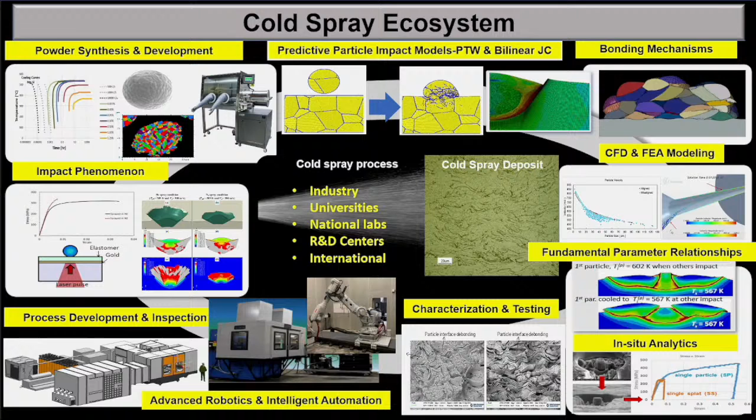I'm not going to go into these areas, you can read just as well as I can. But there's basic research opportunities, testing and qualification, certification, transition, implementation, and development and sales of feedstock powders, equipment, additional hardware, software, accessories, support equipment, etc. That's the ecosystem, and it's not a closed system, it's an open system. We try to make it as open as we can.

We know cold spray. I've personally developed with my team through the years applications and transitions into all these areas - oil and gas, automotive, especially aerospace, right? That's basically the first industry I targeted. But there's others, including medical, antimicrobial coatings you hear about.

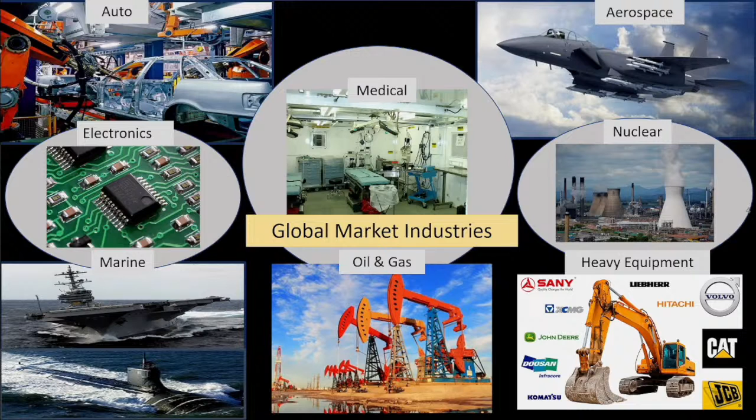And it's so funny, because the work that I did with the team from 2008 to 2010, we published some papers in like '12, '13, basically touting the benefits of antimicrobial coatings. Well, people are crawling out of the woodwork now. If they would have implemented stuff that I had said 10 years ago, we would have been much better off. So there's a lot of visionary statements that I make through the years, that other people make, presentations you'll hear today, and 5, 10 years from now you'll be saying, geez, I heard that first at CSAT.

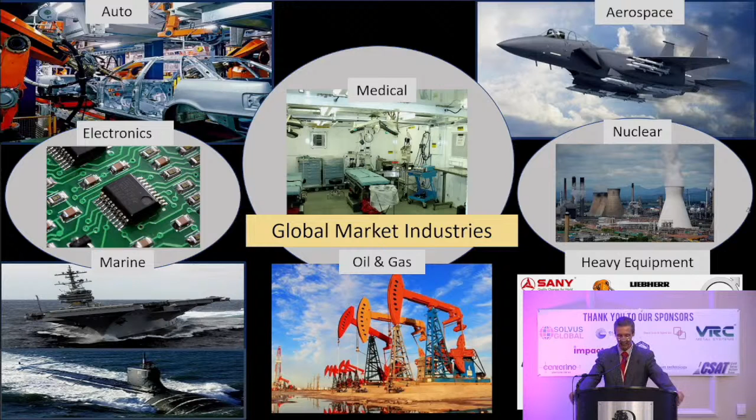And so with that, I'm going to throw up this slide. So part of what I've been doing is to substantiate some investments with folks that I work with, market studies.

This just happened, you could pull this off the internet, that's where I pulled it from. But it shows the tremendous upward trend. And a lot of these areas, I'm looking at Aaron Nardi, through the years that we've developed - we've developed and impacted a lot of these areas. So you see the significant rise.

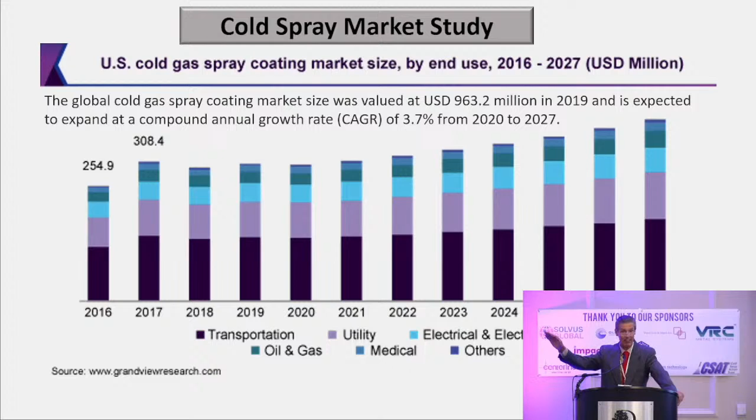Now, I think in dollars we're still about just shy of $1 billion, where thermal spray, I think Keith, is upwards of like $8 billion. And I firmly believe we should be in upwards of that number. And with the advent of 3D printing, I think we should be surpassing that. I think that's what the future holds.

I pulled this to show the importance of additive manufacturing. I'm going to tie it into manufacturing at the point of need and 3D printing. But this is a DoD mandate, and again, you can pull this off the internet, that's where I got it. You see the distribution statement, you see the website where I pulled it from. And this is a directive coming from DoD on the benefits, the attributes, and the go-forward plan.

We need more lethal systems, powered by innovative designs, kind of a general statement. Increases materiel readiness, empowers warfighters to solve problems in theater, right? We don't have to rely on a depot, we don't have to rely on a repair station in theater. But it depends on, hey, how far advanced are we? Are we mature enough? Level of expertise, training, certification. You can buy a system, doesn't mean you know how to use it, all right? And then finally, data.

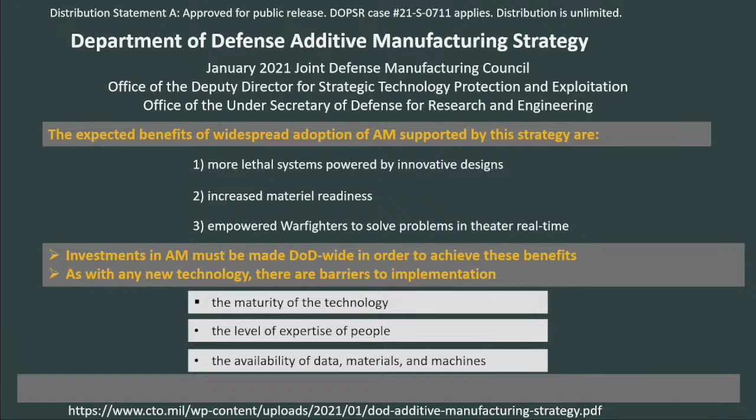Data, data, data. When I first started, the ESTCP program, which serves as the poster child for qualification of non-structural repair, is the one document right now that contains the most data on any single material substrate combination, that's how I'll say it. And that's all going to contribute to how far we get.

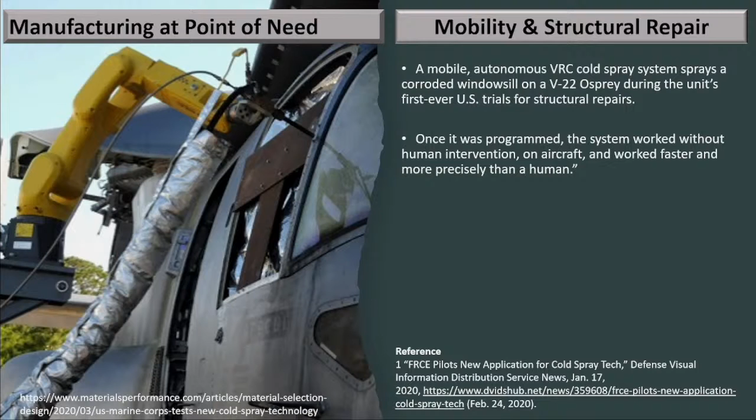All right, I'm going to show you a couple of 2-3 examples, highlights again over the last year or two. I wish Fred Lancaster were here, because this is where he could bathe in the limelight. So this is a news press release on the VRC system, a mobile system, repairing a windowsill area on the V22.

So it's basically a mobile system, you see it's attached to a robot. It can be manipulated out in the theater, out on a tarmac, wherever you need. And here's a quote from Fred: the future is with structural repair. And I'm going to go so far to say he's absolutely right, and go beyond that - structural repair and 3D printing.

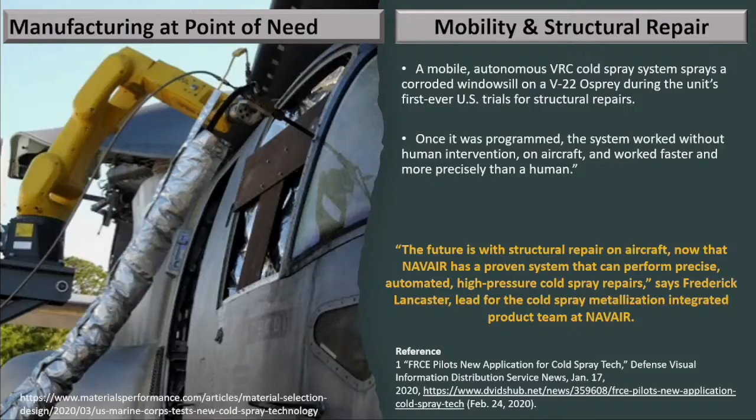I'm going to give you another example of a different system. This is amazing too, and I just heard...

That this August, the Aussies and the U.S. Marines are going to be doing joint maneuvers out in Australia, in the outback, and they're going to be taking a number of these systems out there, not only producing parts, because they've done this before—I think this will be the 3rd time together. Actually, I heard about it, I'm looking at Aaron, because we had to do a tour for a general who basically said, hey, could you do this? I just came back and we maneuvers with the Australians and they're doing this.

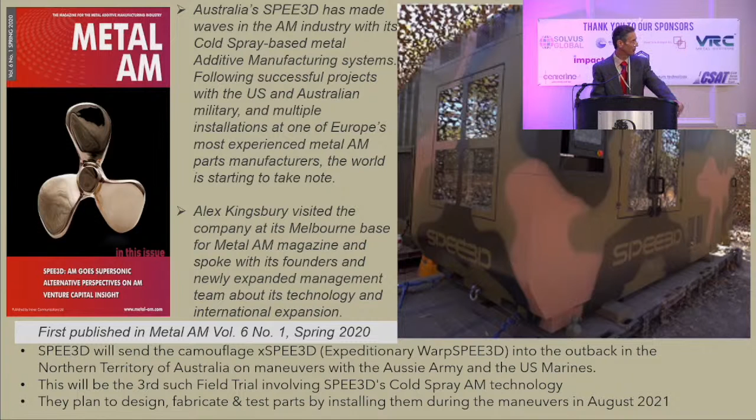So you see, basically, the SPEE3D unit, instead of that bright fire engine red, is camouflage, right? Because that wouldn't go over well in the theater—you'd be a target. But they're making parts, and not only that, they are going to be inserting and testing those parts in theater over, I think, a 2-week period. So that's pretty neat.

All right, these 2 good-looking guys, right? This is over the last year. All right, and here's my quote—I've said this since day one. It's not just a coating technology, it's not just for repair. The future is going to be 3D printing.

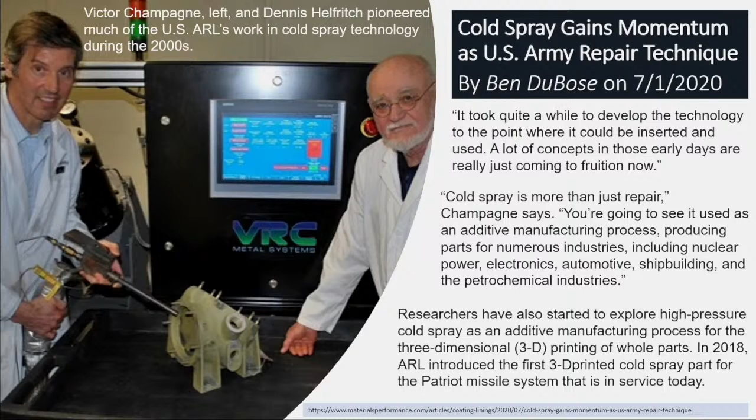So that was printed like last August, July. This thing has a delay. Here's a near-net shaped part. It was produced a couple years ago, 2018, introduced into the Patriot missile.

The future of cold spray systems—I just want to, and I'm going to end with this too. At the end notes on the second day, I'm going to go into this in more detail. But what I see in the future perfect system, and I had said this when I was the keynote speaker at the 2007 International Cold Spray Conference, the 2011, and I'm going to say it today in a different note: the future system, it's got to be flexible.

What does he mean by that? It's got to be adaptable. Flexible, adaptable—I want that future system to be able to do high pressure, to be able to do low pressure, to have software and hardware to do 3D printing. I want that system to be modular in concept, but at the same time be turnkey. I want it to be able to fit in the manhole cover in a submarine because of its modular concept, being able to be taken apart and put back together again. Or I want it in a production setting, out in the middle of the desert, or anywhere else.

I want it to be repeatable. That's not just me—the whole additive manufacturing industry, it's got to be repeatable. You've got to get repeatable results. They've got to be reliable results too, all right? Am I hitting the requirements, the specifications?

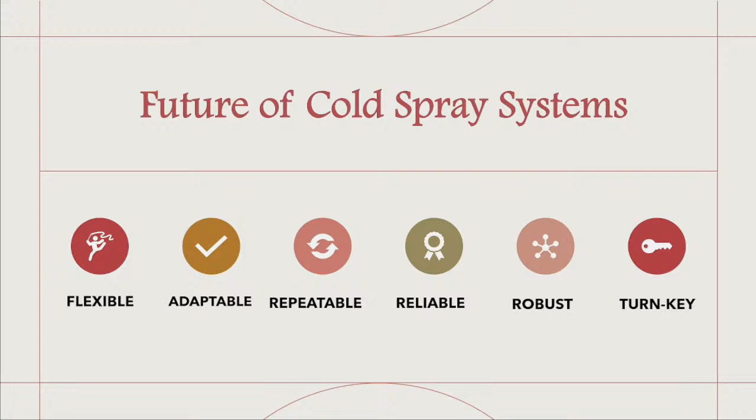Let me tell you a little story. Not all powders are created equal, all right? And I've got a lot to say, and I got to blow through these slides, but it's important. I don't want people using that argument against me by saying, oh, look, you got to buy special powders in order to use this system or that system. Oh, I don't want that. I want to be able to use off the shelf. And that's fine—number one, you can buy these powders off the shelf that are made specific, all right?

But number two, if you're doing a bubble gum repair—and I call the bubble gum repairs what? You're using Bondo, you're using epoxy repair, you got a ding in something, you put a little epoxy—I don't care what kind of powder you use, it doesn't really matter a whole hell of a lot. But when you go to structural repair, when you go to making a 3D printed part and you don't want to post-process, heat treat, anneal—you don't put any work into your feedstock powders, garbage in, garbage out. Actually, I stole my own thunder, right?

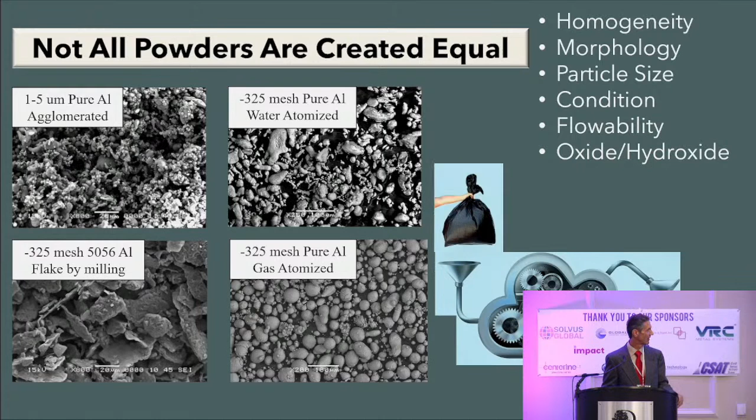This thing has a delay. It's ticking me off. You have to actually press it a couple of times for it to do it once. But anyway.

This is aluminum powder, okay? So to the uneducated, I'm buying some aluminum powder, just give me the number and I'll call. You could get any one of these for aluminum powder. They all meet the chemistry, they'll all meet the past requirements for aluminum powder. I wouldn't meet it now because we've got flowability, we worked into the specification and other things, so you couldn't get all four of these.

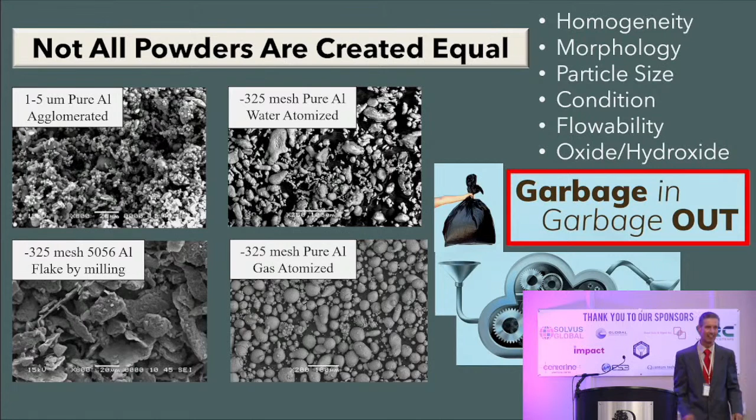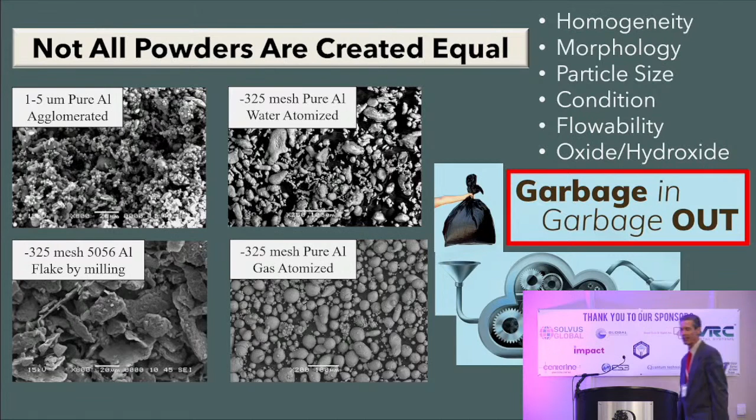Did a little experiment. A guy did his PhD thesis on this that I know. What he did is he took as-received powder, he exposed it to humidity.

And what I mean... oh, they can't hear me online? Okay, alright. So you got to have one of these walking things. I got a little animated here. You got to chain me to this damn thing so I can't see the slide. Actually, I wonder if this helps. No, that's worse. So anyway.

We wanted to expose it to humidity, and I fought with people—I won't say from where, from DOD—who told me that aluminum powder doesn't further oxidize, doesn't form more oxide once it's in a gas atomized condition. That's a bunch of crap, alright? As a matter of fact, I got a further slide—you know what they use aluminum powder for? It's a desiccant. What's a desiccant? Something you use to absorb water. Hello? How does it absorb water? It's a chemical reaction that takes place, and you form hydroxides.

Well, picture yourself at Corpus Christi Army Depot in the summer. Got a bucket of powder that you buy. Typically they don't buy powder just for one spray trial or one spray run, no, they'll buy a bucket. They'll open that bucket up, put in what they need, and then leave the bucket open. If you're lucky, they may close it. Doesn't matter—in the experiment, we opened up the bucket, closed it, opened it up again to simulate, like a couple, 2-3 weeks of doing that. And then we characterized those exposed powders and compared it to a baseline.

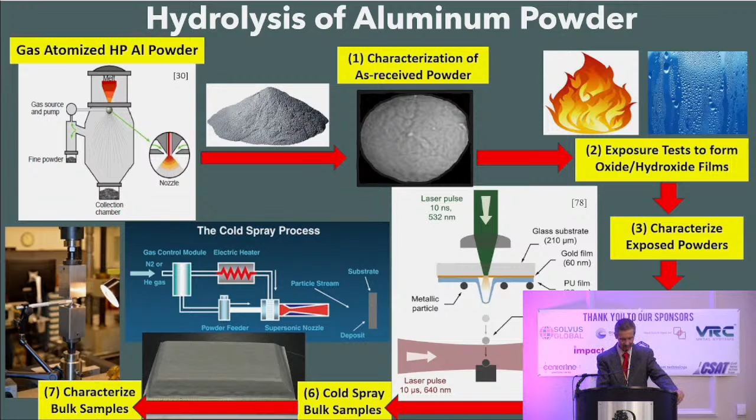I've already said this, yeah, I'm going to point this out again—for those that don't know, aluminum powder is a desiccant. So for people that say, well, what test did you run—you can read just as well as I did. We did everything under the sun to characterize the oxides, the hydroxides, before and after. The most in-depth study that I've ever done, I bet anybody's ever done that I've ever read, by far. Look what happened to hydrogen, look what happened to oxygen, comparing the as-received to the group that was exposed to 95% humidity.

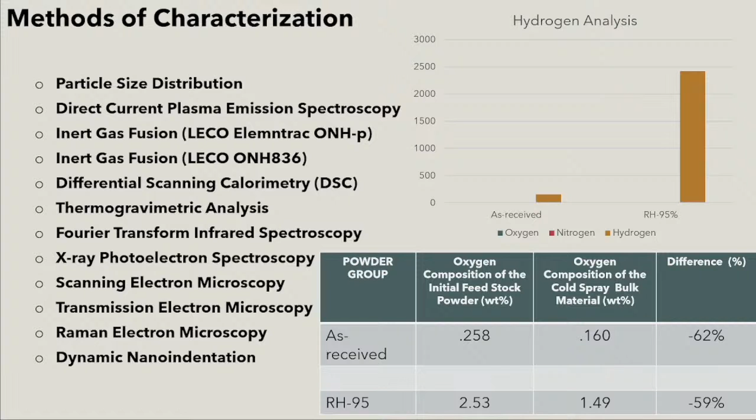It went through the roof. You don't get hydrogen from the formation of an oxide, you get it from the formation of the hydroxide. So it hydrolyzed—that powder hydrolyzed. I'm not going to point out all these different samples. We did experiments heat treating the powders, and you see the differences in ductility. But the point I'm trying to make: you open a bucket of powder, it gets exposed to humidity, it's going in the crapper pretty quick.

And we've experienced that firsthand before we knew this, alright? We got properties in the as-received powder that were great. We sprayed it a week later, and it was garbage. You're doing bubblegum repairs, doesn't matter—you're going to structural, you're going to 3D printed parts, you don't have specialized feedstock powders, you're asking for trouble.

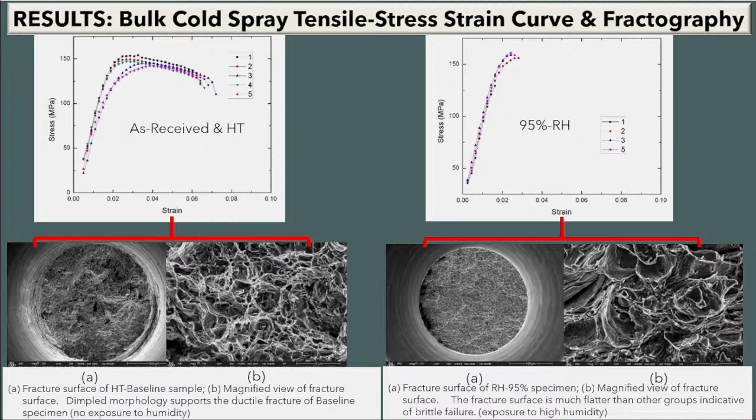Differences in fractography—you know, I don't want to just be a talking head about programmatic stuff, I love the technical stuff. Ductile dimpled in the as-received, intergranular brittle fracture in the high humidity sample. So what did that mean? You got an oxide, hydroxide formed on the outside of that particle, all bombarded, formed a big block of material, bunch of oxide in there. You pull it, it's got no ductility whatsoever, and it fractures in a brittle fashion. You want that on an aircraft? I sure as hell don't.

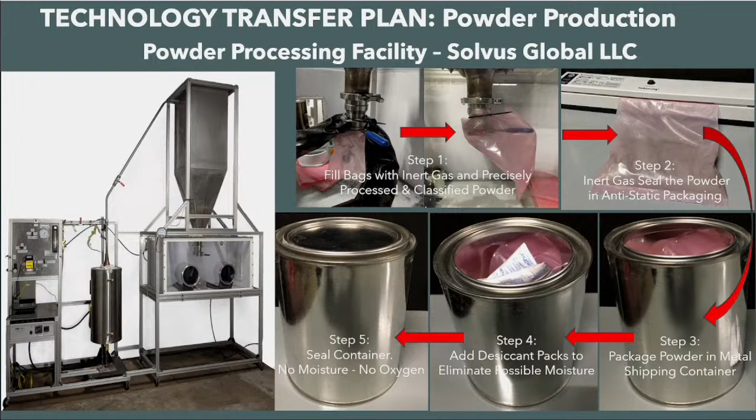This is a process that we use now. We process the powder, we have preferred geometry, and I'm not going to go into all of the different QA tests that we do, but it's flowability, it's chemistry, it's geometry, it's particle size distribution.

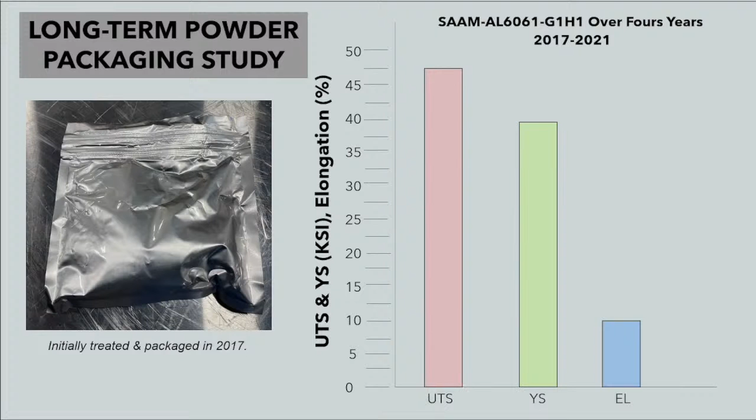And it's packed inert. This is a fascinating study, and this was part of the PhD thesis. I had data which extended to a year at the time. Now we have data that extends out since 2017. I just did some averages and made that chart.

But basically after 4 years, think of a can of tuna. Whether you eat it on day one or you eat it 3 or 4 years from now, you're not going to get botulism and die.

The cool thing about this is 4 years later, in that inert package, I can use the powder. So if I'm on an aircraft carrier out in the middle of the Pacific and it's humid as hell, that powder's protected and it's in its own little cushy world in that inert environment, saying, I don't feel the sea mist, I'm not hydrolyzing, I'm having a great time, I'm nice and dry.

And if you get so inventive, which we have, you can develop a little nipple on this thing such that you've had a female and a male connector to your powder feeder. So even when you put it in a powder feeder, you don't even have to expose it for those few seconds or minutes, if your heart so desires, if you want to keep it to that level of control.

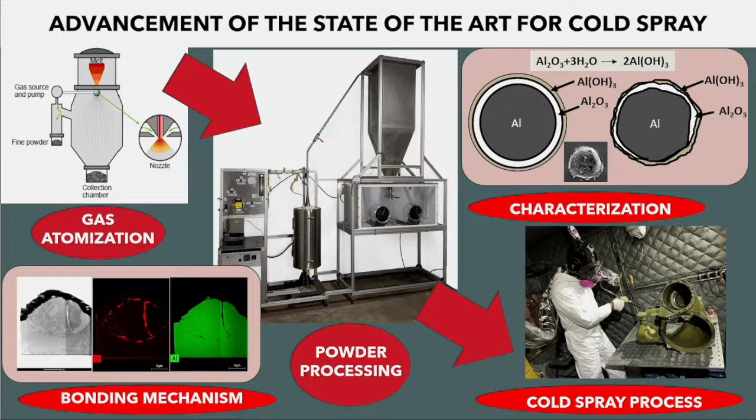I made a little cartoon. So don't think your Al powder has a nice little candy coating like an M&M of aluminum oxide on it when it gets hydrolyzed, when you open it up at CCAD. No, it will hydrolyze immediately.

Helium recovery, I want to end with. Don't think that you can't use helium. You can. There's an actual system.

Actually, I want to go back. That was the concept of just having a turnkey helium recovery system that would be efficient within a short period of time. That short period of time differs depending on how much flow you have.

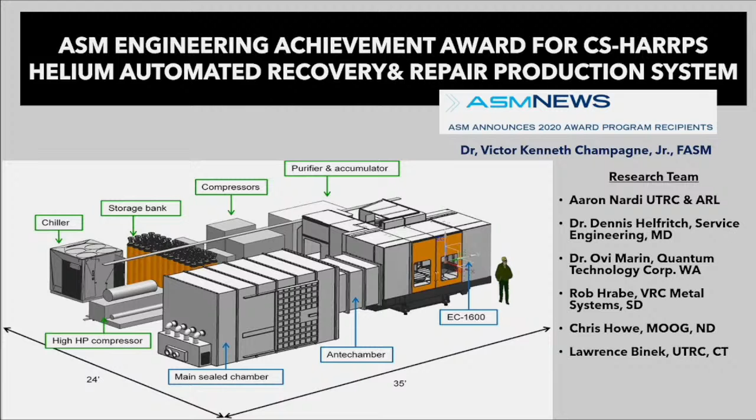I don't have time to explain the entire system. You can see me afterwards, we can discuss it afterwards. But it becomes efficient, I'll say between 20, 30, maybe 40 minutes, depending on the flow rate. So if you've got a 5-minute spray, a 10-minute spray, you're not using this system, but anything else, you do use that system.

It's recovering anywhere between 94, 95% when it's fully in operation and you've got long sprays. That's kind of what it looks like. This is a little cartoon that I threw up — it's God's honest truth.

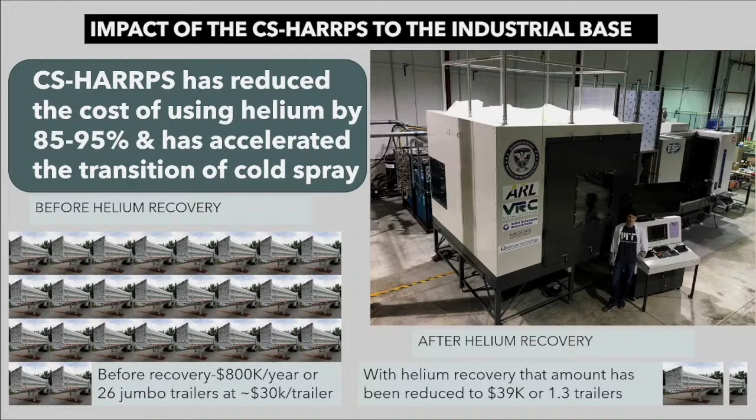When I was at ARL, we were spending 800 grand a year, and that's how many trailers we would have. With the helium recovery, if you were to use it, you'd see that those 26 jumbo trailers would be reduced to like 1.3.

But it talks from a practical perspective. So a guy in a depot, this would be beneficial to. But then also an academic, it would be beneficial, because it's got the theoretical explanation, but the backbone of it is practicality. It's almost like a how-to book.

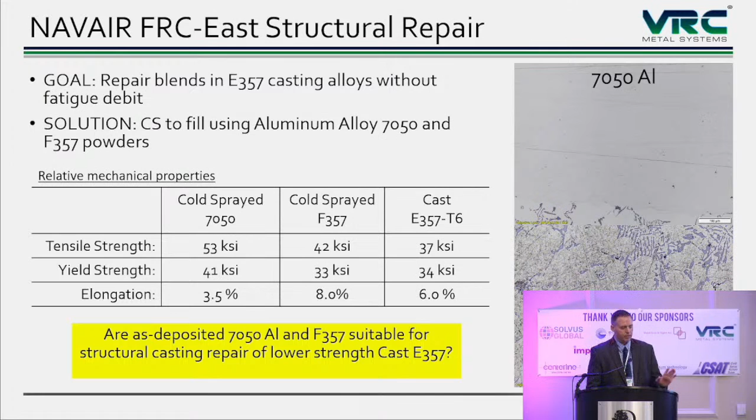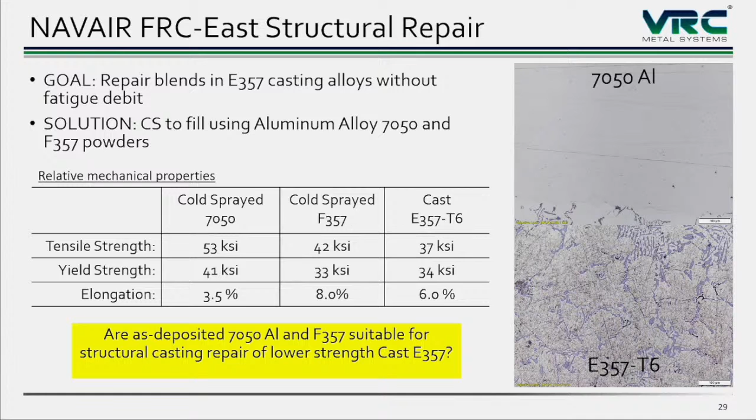So what you see here is some properties of 7050, and then F357 as repair materials for the E357 casting. What's interesting is the strength values of each of these materials is actually higher than the E357 substrate. So in this particular case, we're spraying on material with a higher strength than the substrate material. So now let's see how it performs from a structural standpoint.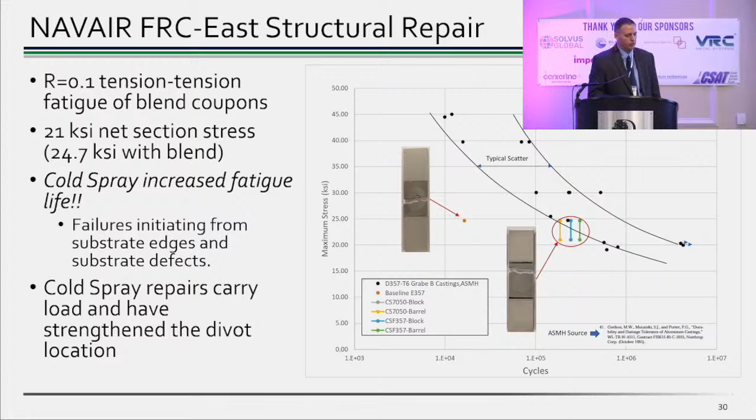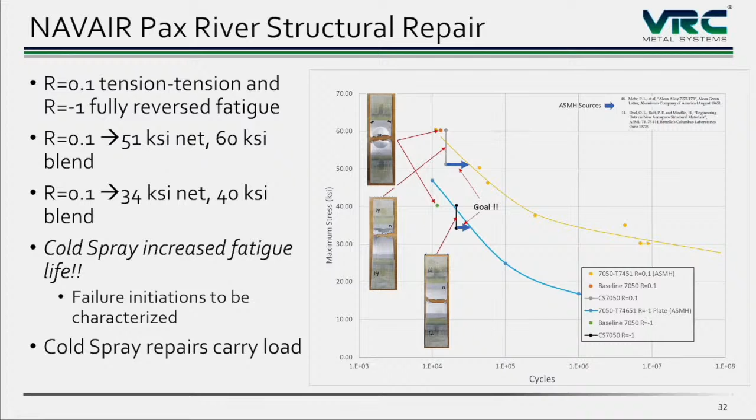So now let's look at a different scenario. If we take that same 7050 material, the cold sprayed material, but now we apply it to a 7050 substrate instead, you can see that the wrought 7050 material has a higher strength capability than the cold sprayed material and a higher ductility. So now can we still use this for some sort of structural credit? Well, we find out we can. In fact, the baseline materials here are this green dot and this little red dot up here.

If you look at the improvement we get at both R equal 0.1 and R equal -1, we're seeing an increase in load carrying capacity. Now, we haven't gotten back to the full strength of the material. That would be where these blue arrows are. We would want to push those cycles out to that yellow line or that blue line. But we are getting increased capability over the divoted sample.

So if you can allow a blend, then you can repair it with this and not have any further damage to the part.

All right, so with that, I'm going to switch gears a little bit, and this gets into, as we start to transition to point of need use, can we go from having to generate nitrogen and use nitrogen, can we go to air?

So we're looking at that for a couple different materials here. One is the WIP material that Vic talked about earlier, which is a nickel-based blend material. And then the other one is an aluminum blend using 7075 powder. So what you see is in both cases, if we look at Positest adhesion testing, so that's your normal glue failure button, right? And then you look at porosity, you see really no difference between these two.

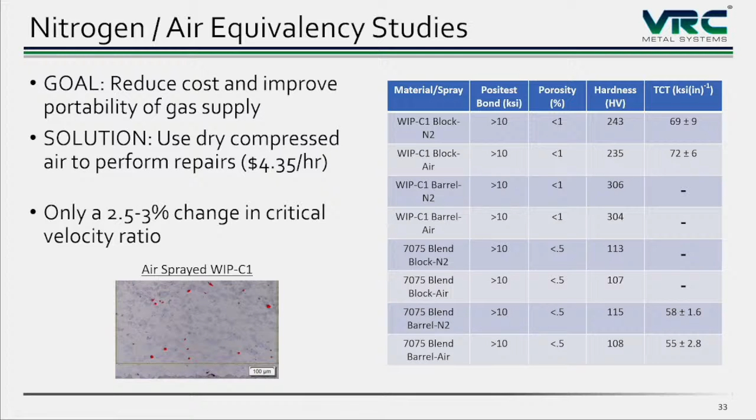Now our predictions say that we should see something like a 2.5 to 3% reduction in the critical velocity ratio going to air. So where does that show up? Well, so far the only place it's showing up is in hardness. And while it's debatable because the differences you're seeing are all within the typical scatter of a Vickers hardness test, you can see consistency from nitrogen to air where you are getting a little bit of a drop each time when we go from nitrogen to air. So we are seeing a slight difference. However, that amount of difference can be easily made up with process conditions. Modify process conditions and you're back to where you were with nitrogen.

Okay, so that's my materials part of it. I'm going to talk about equipment now, a couple of equipment developments.

One is in nozzles. This was a project looking at applying coatings to large surfaces. So if you want to apply a corrosion inhibiting coating, like a galvanic protection, for instance, to a large surface, how might you do that?

Well, we know that cold spray has a very constrained plume, which is nice for us when we're trying to repair parts. It makes masking a lot easier and so forth. However, when you want to coat a large area, having a very constrained plume means you have to have very high accuracy of your path planning and so forth. So if we go to a wide area nozzle where we can spread that plume out a little bit, that'll make coating large surfaces easier.

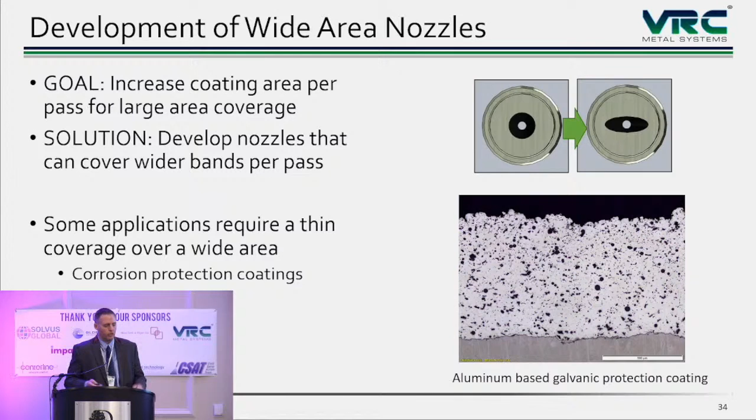So we're looking at a couple different geometries. The first is, well, they're both an oval or an ellipse exit, but using a standard circular throat. And what we did was we took our nozzle 60, which is here, and we took the expansion ratio we had on nozzle 60, which works very well for a lot of these nitrogen sprays, and we opened up the exit to an ellipse, but maintaining the same expansion ratio. And we got two different ellipse shapes here. So let's look at the performance.

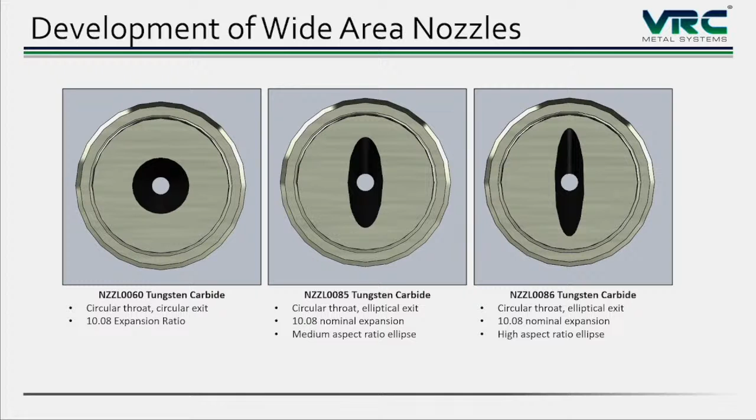One of the first things we would look at is velocity, right? So if we look at the velocity of the particles, we have here a range for nozzle 60 and a much tighter range for 85 and 86, which are these two elliptical nozzles. The range of velocities that you see on the 60 is kind of interesting because the 787 meters per second is actually for a very lightly loaded stream, and if you load the stream up heavy, it drops down to 747. The nozzle 85 and 86, it didn't matter whether we loaded it heavy or light, we got the same result. We got 745 to 748, all within a margin of error here.

So now, if we want to look at what the deposition looks like, you can see these are plates that were made with 4 spots and a circle in the middle just to look at the different paths and what the mounds in the corners look like. And you can see that with the circular nozzle, as you'd expect, you get a little Hershey kiss. And then when you go to these elongated nozzles, you get this wide spread of material going all the way from 8.6 millimeter spread on the circular up to 15 on the widest spread. So now that's going to allow you to change your overlap, your step.

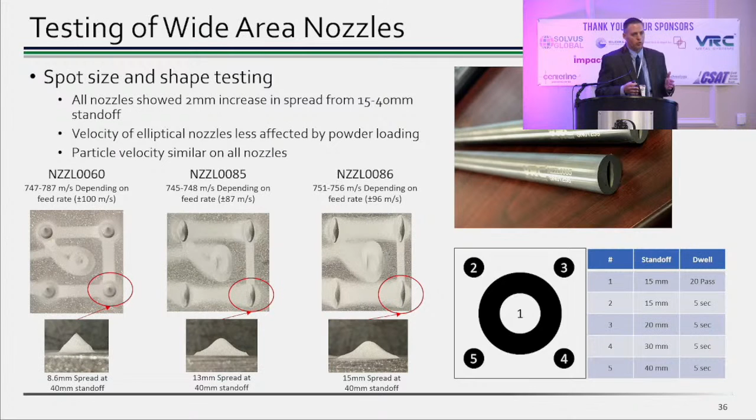All right, next piece of equipment would be the Dragonfly. We talked about this in previous years. I know the Navy's talked about this as well. This was a Navy program in order to fit a cold spray system down the hatch of a submarine. Well, we've modified the design, and we've turned it into a commercial product now, and with that came a couple interesting advances. One is that the hardware was changed inside the cabinet to actually increase the ability to change recipes on the fly. So now you can go from one recipe to another without opening it up and changing orifices and things like that.

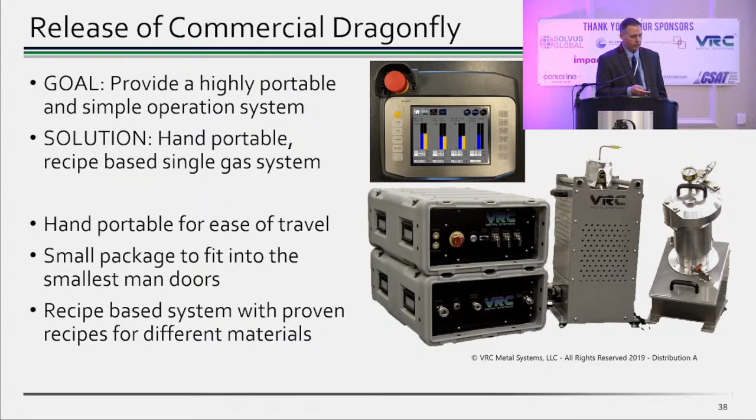So here's the functionality of the pendant itself. By the way, the system still has the same performance characteristics of 1,000 psi, 800 C as the regular systems. But in this case, one of the unique parts about this pendant is it's preloaded with recipes. So in this case, you don't get, like Vic was saying, a cold spray system you can't run, right? You need to learn how to run it. Well, in this case, it's preloaded with certain recipes so that once you get it, you can immediately go in, select those recipes. They're pre-qualified. We give you data sheets with them so that you know what you're supposed to get at the end.

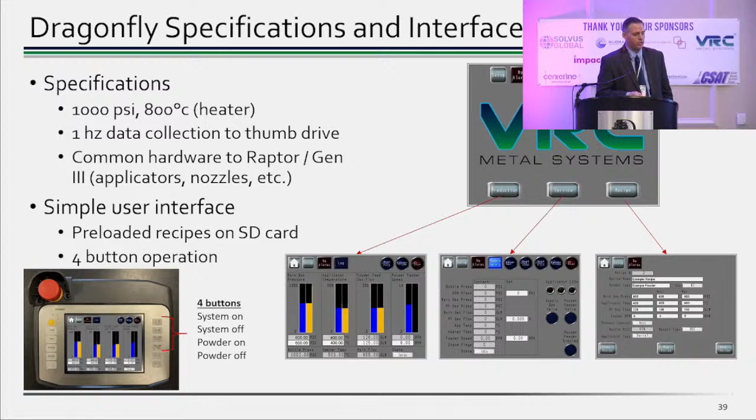And then you can start going, and the operation is very simple. It's a 4-button operation. Once you select your recipe, you press one of 4 buttons to start the system, stop it, turn the powder feed on and off, and that's it. So this is very turnkey for people in the field.

All right, so now we've talked about materials, we've talked about some equipment. Let's talk about how we put this out at the point of need for the warfighter or for other commercial entities to use. And here we have a trailer system. This is very similar to what Fred Lancaster had shown in previous years and what Vic had talked about today with the repair of that V-22. The major difference with this trailer system is it's got onboard gas generation. So in this case, we have air compression and gas cylinders so that this thing can operate all day long and then operate again the next day, and you don't have to keep bringing in tanks and so forth.

It's also got another, I guess, portable platform for the robot, which I'll show you on the next slide.

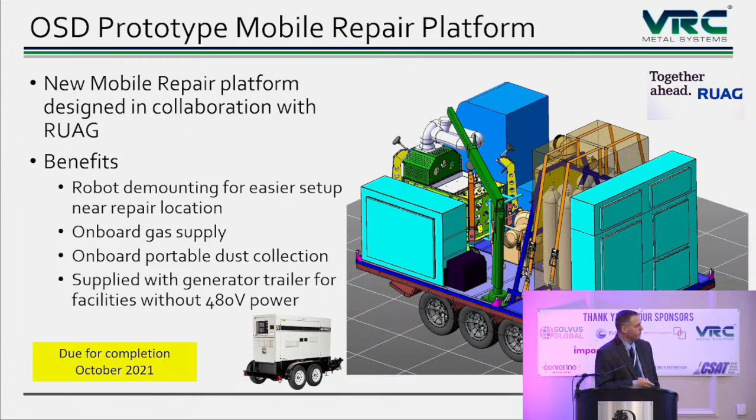There we go. So this portable platform for the robot is an electric cart, basically. It looks kind of like a beach cart to me, but you've got this cart with a robot arm on top of it, which also houses your heater and your powder feeder. So you can wheel this over to the aircraft or the vehicle you're working on, put down these little outriggers to stabilize the unit, and then run the robot and repair your part or vehicle. If you're doing a hand spray, you can dismount the gun from the robot, and then do your hand spray, but you still have all of your equipment right next to you, which is a little bit convenient.

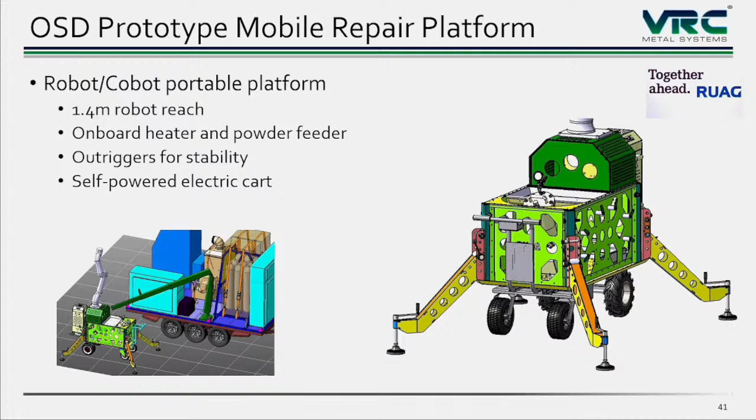And so the last one I'm going to leave you with is what we're calling the mobile parts hospital. This trailer and the mobile parts hospital were both envisioned through this OSD Mantech program. This one is unique—it's not something we've ever done before.

What's interesting about it is it's a complete turnkey system that you drop in place wherever you want it in the field. This is a full manufacturing cell for cold spray operations, including power generation and gases, which I'll show in a little video clip. This unit is due to be completed in August of this year, and the trailer is due in October.

So I think this should—hey, it worked. All right, so what you're going to see here is just a visualization of the unit. It's got doors not just on the ends, but on the side, so you can access each of the components as you go.

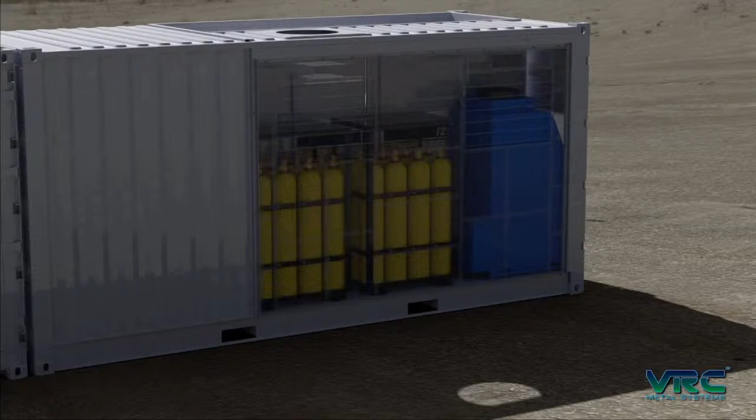Here's where the compressors are—that's a compressor and tanks. This is enough gas to run continuously for 8 hours of operation at max flow for the systems. If you're running at less than max flow, it will run even longer. You can run it almost indefinitely at roughly 800 liters a minute—around there, you can run indefinitely.

In the next compartment over, you have this generator, a 125 kilowatt generator. This supplies the power for the cold spray system, the robot, the heaters, the air conditioners, all the stuff inside this unit. It's all climate controlled and so forth.

In the next compartment, this is what we call the utility box—it's got the generator and the compressor in it. It's got a little area at the end, which should open up to show you a work area. Where these two join up, there's a joint that connects this work area to the next work area.

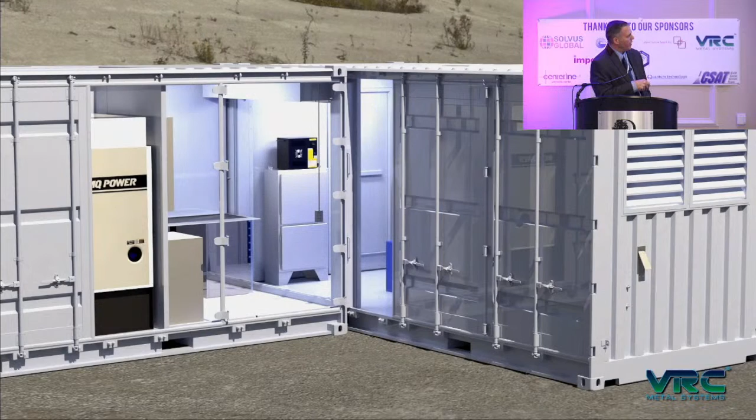So your actual spray operations would happen in this area. Your dust collector sits here, your control systems sit here. And then the final location—this door, when it opens, will be your actual spray booth.

So this is a full spray booth with a welding table, dust collector, and robotic arm. You can do all your work, whether it be additive manufacturing or repair, right here, and then operate it from that next room.

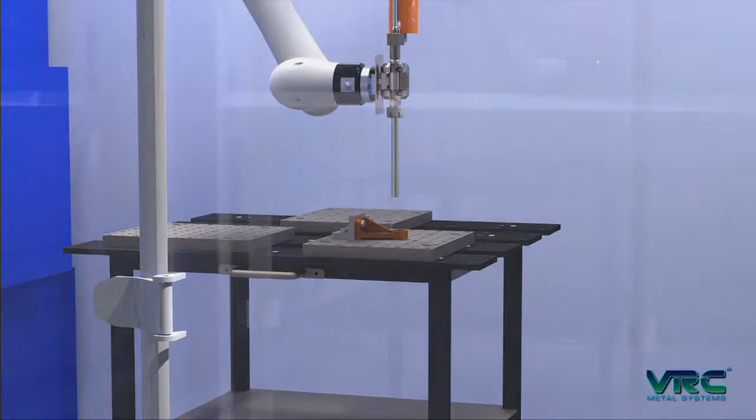In addition, once this thing goes on site, wherever it sits, there are also external hose attachments so you can go outside and do work, like on a vehicle for instance. In that case, you'd take the heater and powder feeder out, connect those up, and then do your work on the vehicle.

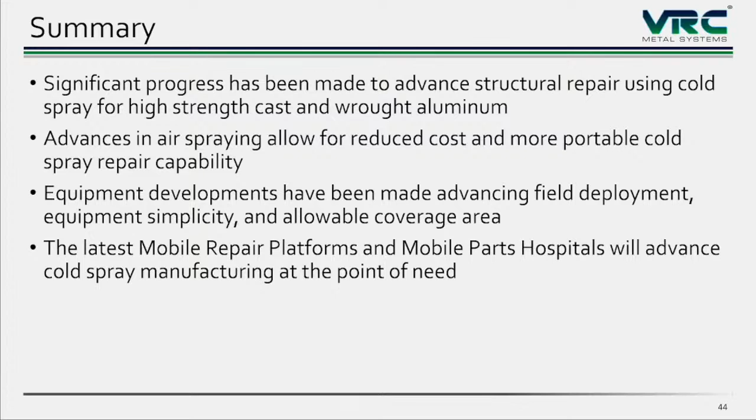And then you're done. So with that, I guess I'm gonna stop there. If there's any questions, feel free to shoot them out—I'll try to answer them.

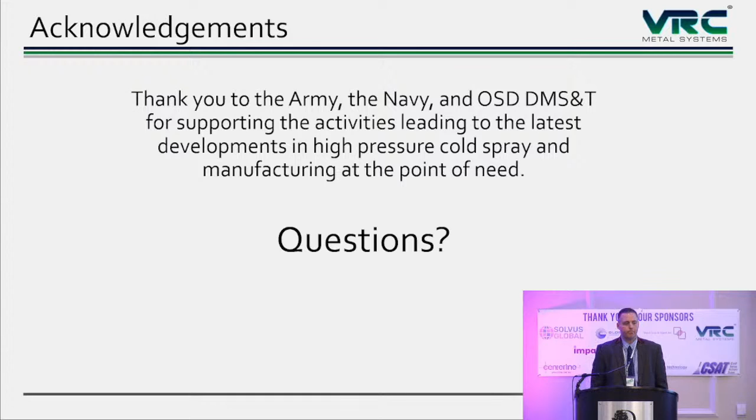Question: with the wide area nozzles, are you able to increase stream loading more because you're getting better consistency with the speeds, or is it still limited, and how does it work overall? So the question is, with the wide area nozzles, can we increase the stream loading beyond where we'd be able to with a standard nozzle? The gas flow through the system is the same because the throat is the same in that nozzle, so I wouldn't anticipate we could load up the stream any more.

However, I think today we really can't utilize the gas the way we need to anyway. We can actually load up a nitrogen stream a lot more than we ever do. Typically, even at high RPMs on your powder feeder, you're still only at 2% stream loading for most materials. We can push that up to 5 easily—that's been shown by Sandia years ago. And actually Ozone did some work pushing it all the way up to, I think, 40% stream loading. So we have a long way to go on stream loading; we're not limited by the nozzle today.

Any other questions? Comments? Yeah?

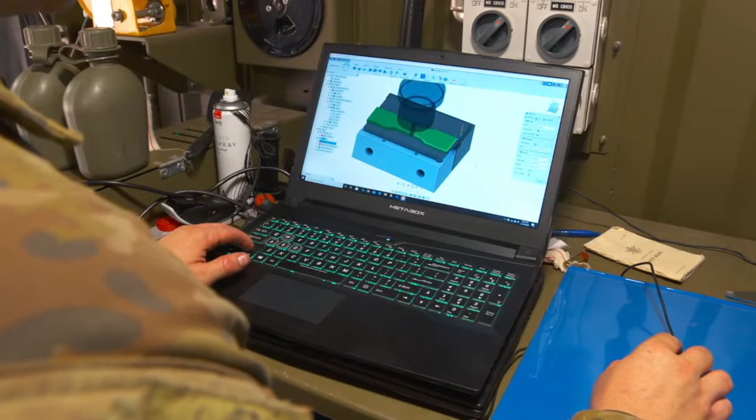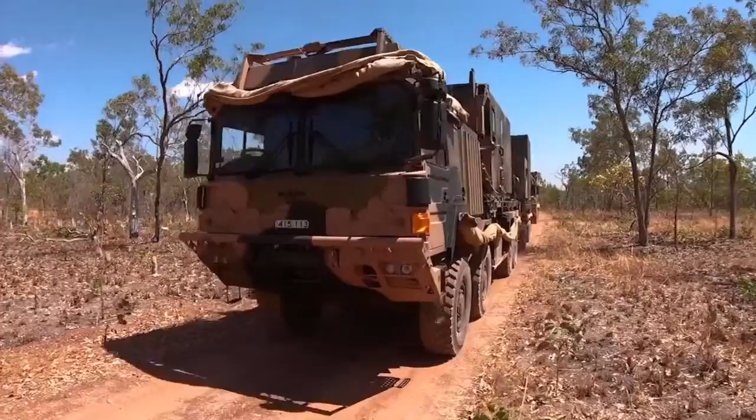Earlier this year, the Australian Army announced a $1.5 million investment into a 12-month pilot of SPEE3D technology. The program includes training soldiers in 3D printing and trialing SPEE3D's large format WarpSPEE3D 3D metal printer. The trial is designed to test the feasibility of deploying these printers both on base and in the field. WarpSPEE3D uses patented cold spray technology that enables significantly faster and more cost-effective metal part production. Developed in Australia, the printer is capable of printing large metal parts up to 40 kilograms at 100 grams per minute. The trial has proven the printer and auxiliary container can be easily transported on the back of HX-77 trucks.

This 2-week training exercise at Mount Bundy is the second in a series of exercises in which we are putting the WarpSPEE3D through rigorous field testing, for example loading and unloading in various terrains, emergency stops and redeployments, and general operation in austere environments.

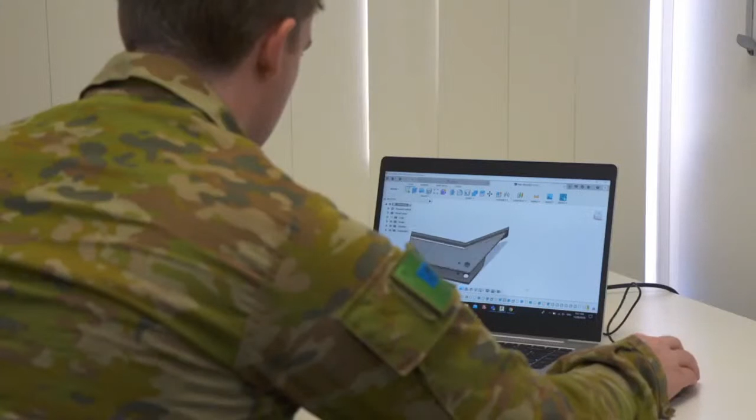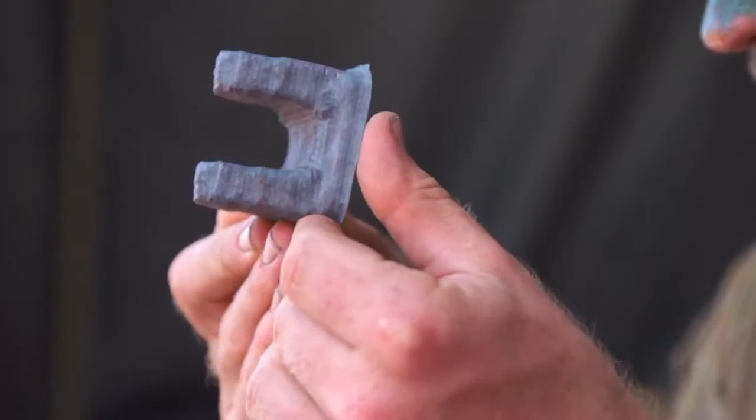Soldiers have been training at Charles Darwin University for over 6 months now, learning everything from design to certification of 3D printed parts. They have produced over 50 case studies of parts that can be replaced in the field with metal 3D printing. As an example, here is one of the parts produced today, a bulk fuel module mounting bracket which enables safe operation of manual fuel pumping. This part was designed by one of our trained soldiers and is able to be printed, heat-treated, machined, tested and put to use here in the field.

The ability to print repair parts in a deployed environment will significantly reduce our footprint and repair damaged equipment on the spot to get us back to our main priority.

Fantastic. Okay, so that video there gives you a flavour of what the SPEE3D and Australian Army trial was all about. Actually, in the first 6 months, using cold spray, we as an army were able to demonstrate that the technology exists to allow soldiers, and therefore, if you wanted seamen or airmen, military members, to take the latest manufacturing techniques out into the field and use it to make real worthwhile parts.

And this is what defense forces around the world are looking for. And specifically, defense forces, having been there and been in that environment, we need a capability that is deployable. Now, the topic for this part of the conference is cold spray at the point of need. And I was asking myself, what is the point of need in Army? Where specifically is it?

Now, there is no one location. Armies will always say they want to repair and maintain equipment as far forward as possible, to keep that piece of equipment in the hand of the user so the fight can go forward. The same is true at sea as it is in the Air Force.

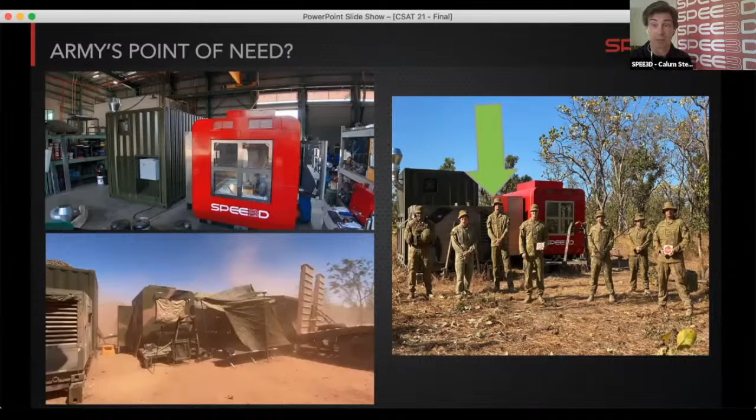Here we have one of the relatively new Australian Army fuel trucks, a bulk fuel capability. It's a Rheinmetall stroke MAN truck with an Australian fuel system on the rear. There are maybe half a dozen of these that would support one brigade, one fighting brigade, so let's say a few thousand soldiers. And they are battle-winning bits of equipment, because without fuel, your army doesn't move.

So if these break, these are the number one priority for repair. And this is a brand new bit of kit. Now, with every bit of brand new kit, there are always points of failure, and that's to be expected. So there's no finger pointing here.

But they don't exist in the supply chain. Now, if this was Afghanistan, do you say we need to fly this part from around the world into Afghanistan? Or worse still, do you go to your supplier and find out it isn't in the supply chain, and that you need to wait for the part, then fly it out?

Or do you say we have our own manufacturing capability, but it's in America, or it's in the UK, or it's in Australia, not in the theatre where we need it, and say to that manufacturing organization out of theatre, we need you to make a bulk fuel module bracket for us.

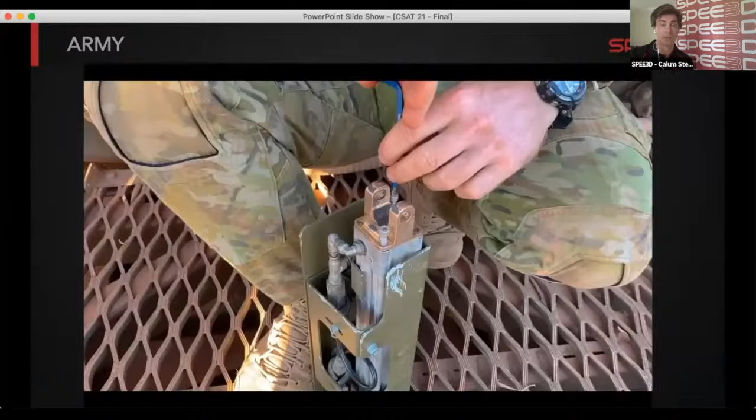Next part, I'm going to move quickly because I realize we've only got 30 minutes for the whole segment, and Vic probably wants to chat.

Gunner's ratchet, 300 armored vehicles, M113s, buckets in Australia. 5 out of every 6 do not have this piece of crew equipment, a simple gunner's ratchet. It's a very old vehicle, it's an old gun, and therefore it's no surprise that the tooling that goes with it breaks, disappears, gets lost over time. But they're crucial. You can't maintain the gun without this spanner.

6 months to get it made. We've had quotes in the army of up to $1,000 Australian for this part. SPEE3D had it as one of the case studies within the trial, and you can see the results there for yourself, just how quickly and easily it was for us to provide capability using our technology.

And again, where do you do it? You make sure you're doing it in theatre as far forward as is practicably possible.

Final piece, the Australian Army have a particularly old fleet of landing craft. We're talking beach landing craft vessels. And no surprise that when it comes to pump housings, particularly if the original is made of aluminium, it's going to corrode, it's going to fail, it's going to break. And we are talking Vietnam era technology or Vietnam era vessels. These fail regularly.

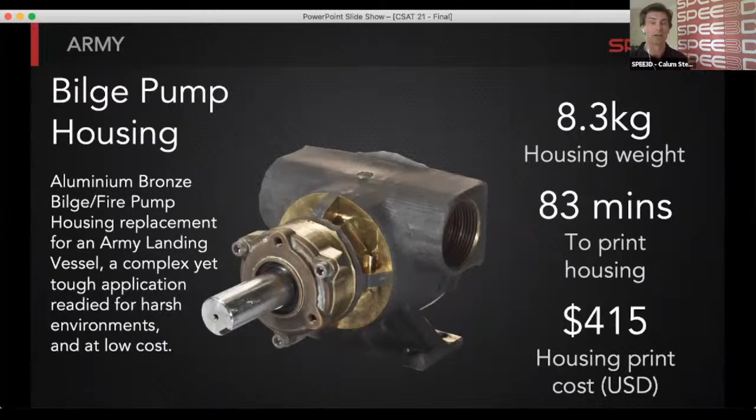And it was one of the more complicated pieces that the soldiers had to redesign and print. But again, where would you be doing it? You would be doing it in theatre as far forward as possible.

So what's next for cold spray as we see it here in SPEE3D? We are having fantastic success with the Australian Army. We're going gangbusters. And we are in discussions with other defence forces around the world and defence primes. And the conversation is always about use cases: am I going to be able to make use of this capability, of this technology?

This is where cold spray gets into its defense market. I've gone back and watched some of the presentations from the previous workshops, in particular Dr. Champagne's presentations at the start of each year. I see his timeline of what's happening with cold spray and what he expected to happen over 10, 15 years, and the final stage being near net parts.

We are absolutely at this point with cold spray. So long as you can deploy it, so long as you can get it into the theatre of use, you have a market for cold spray, because the parts being made are to the standard required. And that standard I always coin in defense as good enough. The standard is: is it good enough for the job?

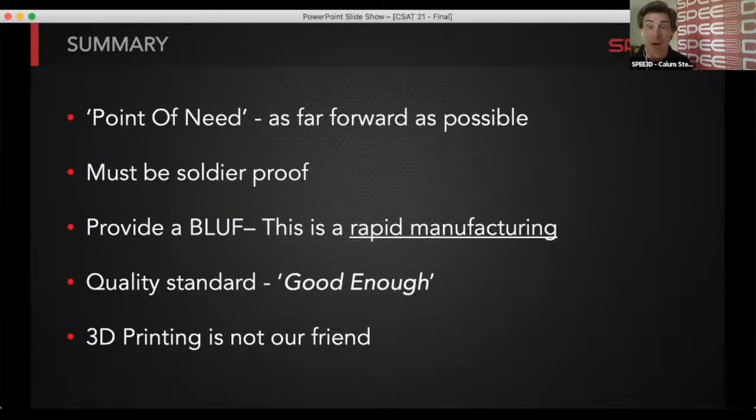All right, so we should have Calum on here in the background, maybe. We'll know in a second if we can hear him.

All right, fabulous. So we have a couple of online questions, and we'll take questions out here as well. The first question coming in is really around part performance. You talked about quality being good enough, but when you get in those situations where maybe you need more than just good enough, what kind of performance are you able to get out of the properties of the materials you're putting down? Are you able to achieve anything structural, and where does that fall into the timeline of cold spray's printing capabilities?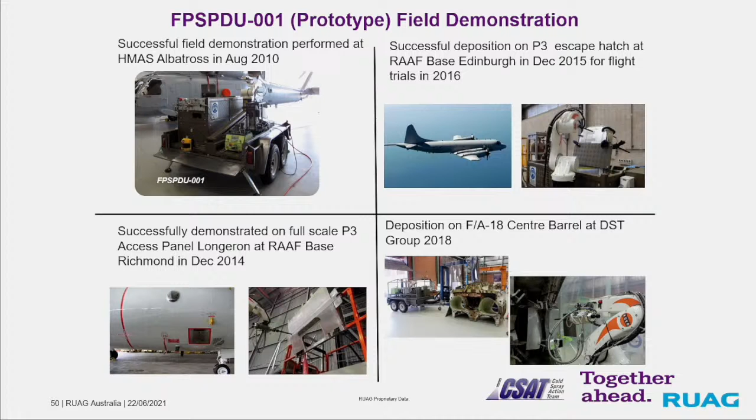As I say, we started out with a field portable SPD unit, 001. We demonstrated that to our Navy in 2010. We've taken it to Air Force bases, and that was an extended application to demonstrate application on a P3. We've taken it to Edinburgh, so these bases are fairly well dispersed around Australia, and we then took it to our Defence Science and Technology Group for an application on the centre barrel, which underwent full-scale fatigue testing. This was really where we saw the ability to take the mobile technology and apply it in structural applications and structural areas.

From there, we've developed a number of systems. This system here goes from that original system to what we call Brolga 0. It's the one that we have in our facility. We've replaced the old CGT gun and the powder feeder, generated power distribution boards, gas supply, interfaces. We've got the HMI screen interfaced into the system, and we got rid of the gas cage, because we felt that most of the applications we were using had access to nitrogen and external power. We've modified a number of those elements as we evolved the design. That's the unit we have and currently use in our facility, and certainly the one we will take on the road for demonstrations going forward.

The next slide, please.

This is now its current configuration. As you can see, we've generated a main supply unit, full of the gas train and some of the other elements, a lot of the module and the PLCs, and predominantly made of commercial off-the-shelf components. We've repackaged the circuit boards and made them dust-proof for field operations, so we're continuously aware of customer requirements and also supportability through the utilisation of commercial products.

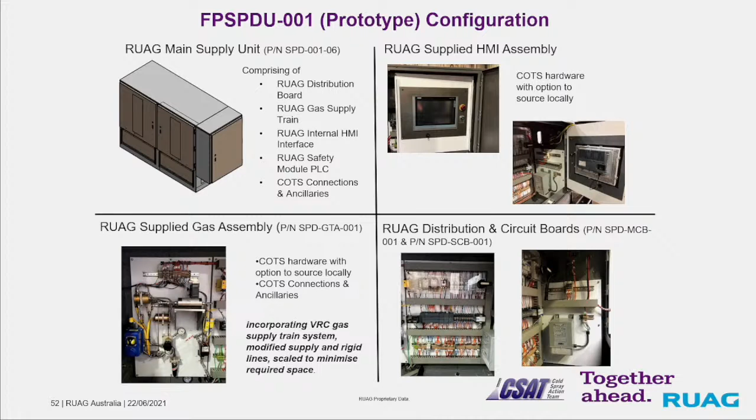For recent applications, whilst I love robotics dearly, there are applications where we've seen it's just more practical to use the handheld. What you see there is a fairly large repair we're currently doing on a Chinook sump cover, heavily corroded in all areas, particularly around Rosan fittings, so we've had to replace and pull out existing fittings and look at the SPD in some of the fastener holes and around the fastener holes. A lot of the time in this is programming the robot. It's more difficult with holes, we've found, because they're not in predictable positions, not necessarily where the drawings say they should be. For those applications, we've felt that the handheld enables us to do that.

We've just done some work for another customer producing a whole range of test samples, and we had the opportunity to do particle measurement, which again shows we're getting very good distributions and velocities above 700 metres a second. These are depositions of 2000 and 7000 series aluminium. We also used the opportunity to continue looking at the impact of thermal issues and thermal stresses and their potential, which are particularly of interest when we look at the durability and fatigue behaviour of some applications, particularly in highly loaded and highly stressed areas.

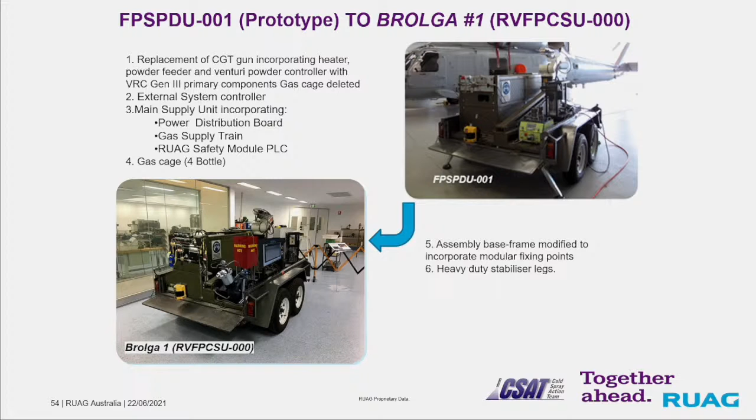That's a brief rundown, and I'm sure if you want any information, either VRC or Fred can take you through those. We effectively sent one of our guys over to do the validation and verification. Going forward, with our relationship to VRC, we'll probably do the assembly in the US. It makes a lot more sense. It's easier to buy a trailer in the US than to air freight one, even though ours are probably damn fine. But there are some logistics we can do.

What we are doing is that the current designs are extremely modular and can be repackaged or unpackaged for customer applications. So what we're always keen to do is give that accessibility to the target, and where possible use robotics again for the reliability and the repeatability.

I believe that unit we supplied to NavAir is being used in situ for some helicopter repairs, I think it's the skids, but Fred and perhaps other people closer to the unit can give you more information.

Aaron's already introduced this one, but this one's, I call, a bit of a monster. There are some elements of Brolga 1 in it, very remotely. It fits on a trailer, there are module elements, and there are gas bottles, and that's probably about where it starts and finishes, I think.

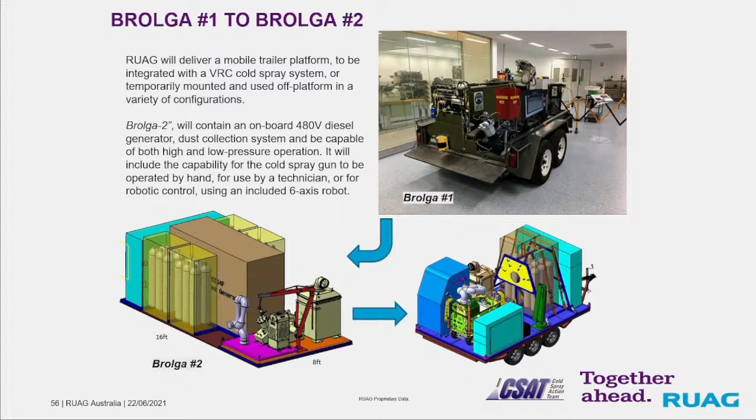This thing comes in at about 4,000 kg, and it's a 12-foot trailer, so it's quite a large item, but it has everything on board that one requires, and that was the requirement of the customer. I think all it shows is that this technology can be modulated, compartmentized, and delivered in various forms, as we've seen.

We've retained the robot again for those critical elements of structural application.

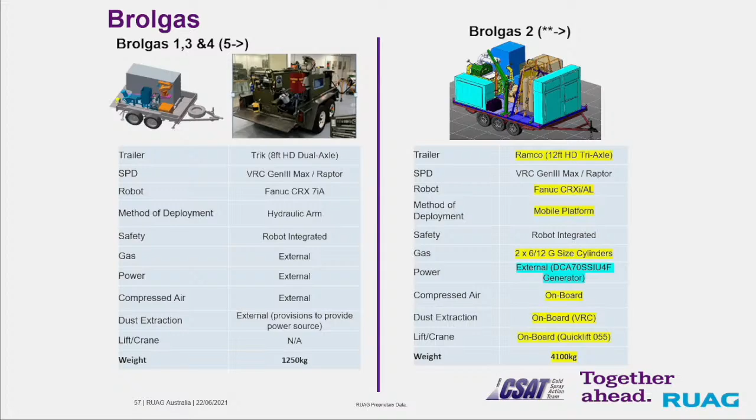This is just an overview. So we do have the trailer, it's in our shop now and being fitted out. It's well on the way to getting across to the good US of A as soon as we possibly can. I think a lot of design activity has gone into the deployable cold spray platform. It looks like it's from outer space.

You'll see all the various modules. Again, they can be rearranged, repackaged for whatever the customer wants, but I think the iterative nature of the design between ourselves and VRC has led us to what we think is an optimum solution, and we're now down the track of manufacturing that particular concept.

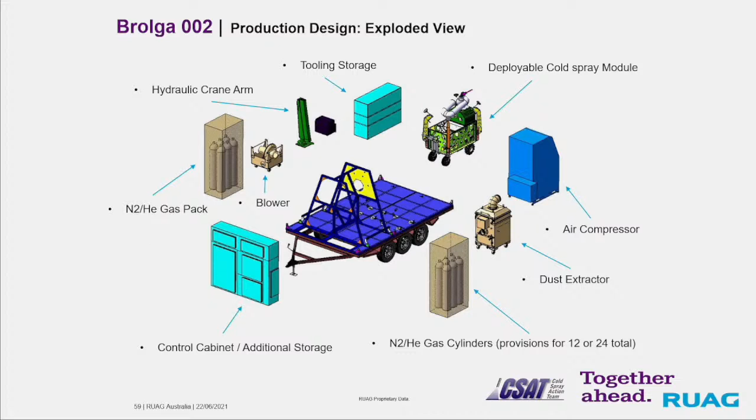This is very interesting because you've now got a mobilised trailer. You can basically take the technology closer to the target without having all the trailer elements there. This has been an evolving and interesting design program. It looks like it's space age, but that's all weight reduction.

I spoke to the guys actually doing the assembly now, and there's probably over 100 bits and pieces that go into that structure. But it's obviously designed for stability. We're very conscious of the heater and where things sit. It's all accessible, so lots of bells and whistles in this little package.

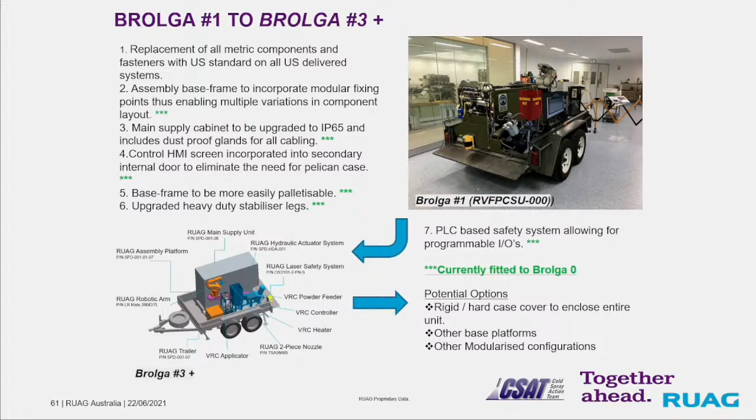Where we go in the future, what we believe is, and we've picked up for the future systems that we've quoted for, we're effectively picking up many of the features that we've put into our Brolga Zero. We think they're significant improvements. A lot of those improvements came out of the validation trials of the initial Brolga. We've picked on those and added a few more to basically meet customers' requirements. So quite a slick little unit. It is a high pressure system, and the robotics are quite a significant part of that.

So I just want to touch on very briefly, I'm watching the time, so we continue to repair aircraft components. The latest one we've done is a sump cover. The amount of corrosion and the requirements for application are quite significant, and it's required a fair amount of activity in both the modelling and the machining, but the outcome will be that we'll probably put back into service something that will have a much longer life.

We're incorporating the new coating technology of Tagnite as well, so that's progressing extremely well, and we continue to repair F-18 components, not only for ourselves but for our mothership in Switzerland. And there's a lot of interest. We are starting to get US Navy wheels as part of an agreement, and we're starting to implement those repairs as well. So that continues on, and there's plenty of other opportunities and other platforms.

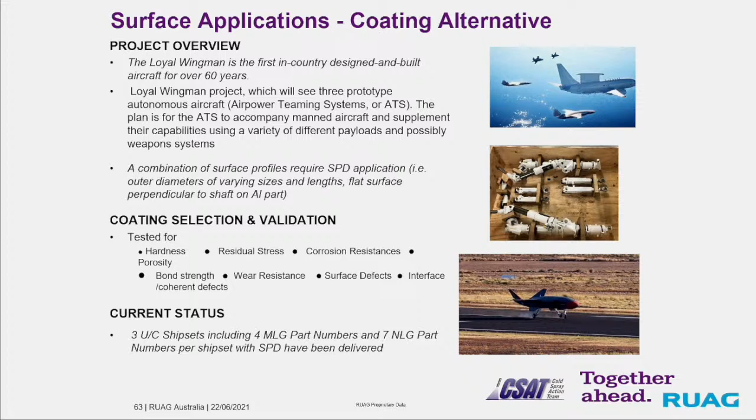Quickly flash through the next slide, please. If you can go to the next slide. Thank you. And that's just some indications. So we're coating very small bits, but again, quite large pistons and things like that. It's a single coat deposition. The challenge was, interestingly, after you coat it, how do you machine it? So that produced a challenge to our machinists. But we've got there, it's a very highly polished finish, and it performs extremely well.

The last slide, please. So we've done an enormous amount of work with Monash University on durability over the last 12 months. We see that the overarching requirement for this as a structural application will be to adhere to the durability requirements detailed in that USAF Structures Bulletin. We believe that if we can meet those and be able to analytically evaluate SPD cold spray repairs, then we will have achieved a significant amount of evidence to go into acceptance.

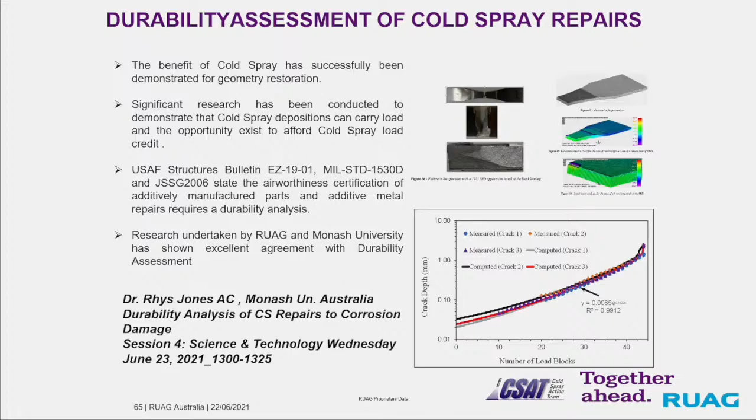Thank you, Neil. Wish we could have seen your good-looking face here in person, but as usual, great talk, wealth of information, hitting all the high points that I wanted. I'm going to take us into break, but beforehand, do we have questions for Neil? I'll ask the in-house crowd first.

With all these systems, okay, sure, Gene. How does the cold spray carbide landing gear compare to the HVOF carbide cobalt, which is also used? So Neil, the question is on that landing gear, how does the cold spray wear coating, the tungsten carbide cobalt, compare to the HVOF?

In terms of micro cracking and all sorts of things, all the indications and wear results we did in comparison show much better wear characteristics and a much better finish. We think the bond strength is much greater than the coatings. The other thing is, obviously the biggest issue, it eliminates any issues of thermal activity that you'd have with HVOF, so we didn't have to go down that qualification route of trying to demonstrate there was no ill effects on the substrate.